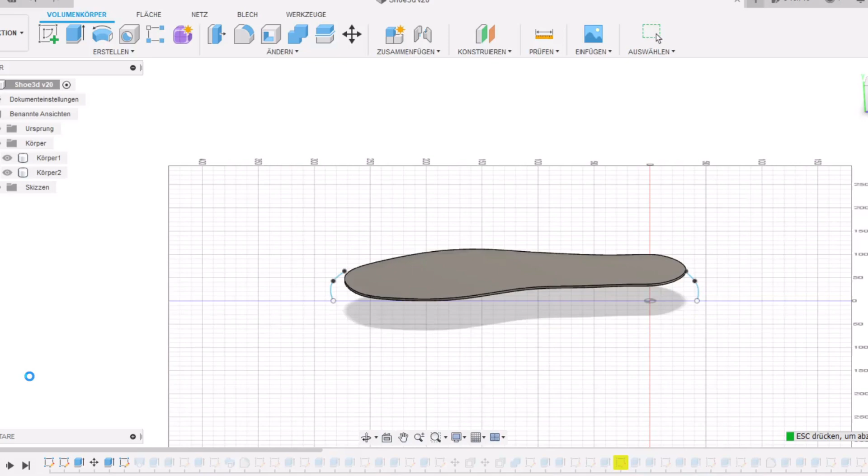As every time, I started with drawing the outline of my foot. When you do that, it's very important to angle your foot because otherwise the shoe will be too short when you actually walk with it. But you can also take the sole of a shoe that fits you well. Copy it to Fusion 360 and then extrude it down, how high you want the sole to be in the back. I recommend taking 3 centimeters. Then you draw another sketch to cut it so that the sole is about 1.5 centimeters in the front.

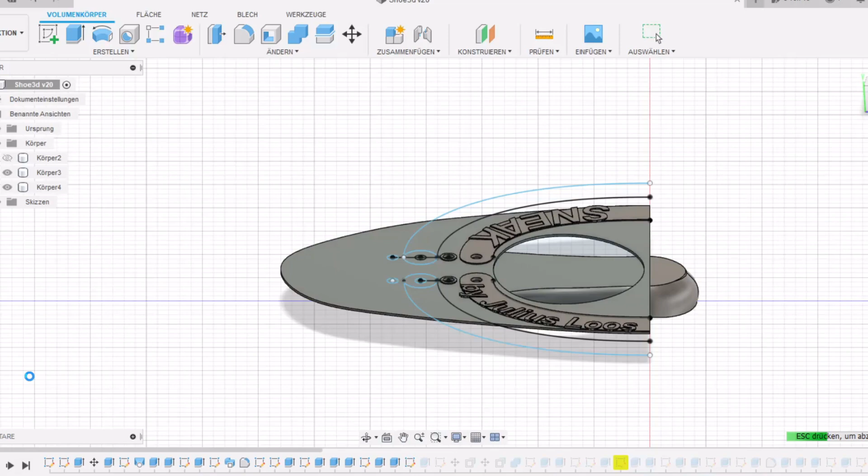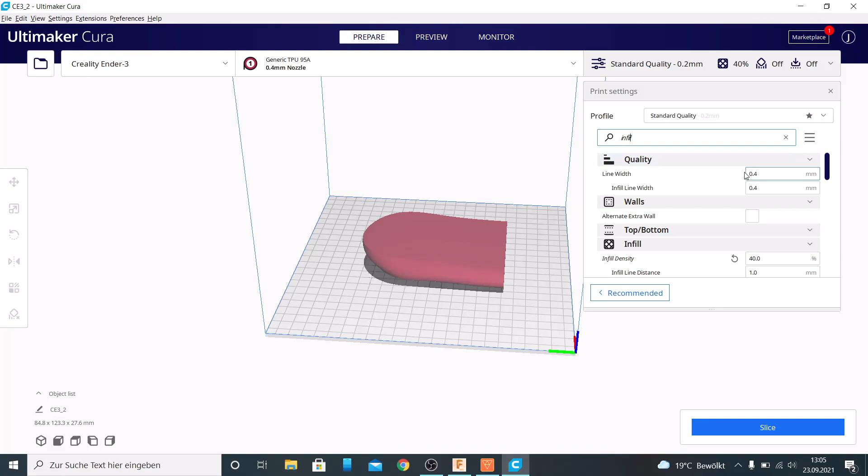Then you need to take a bigger paper and wrap it around your foot. Then you draw where it touches the ground, and also other important things like the cutout for the leg or for the laces. Copy it to Fusion 360 and add an adhesive surface. Cut it down so it fits in Cura, and then you can change things there, like changing to 0 wall, top and bottom layers, and the infill to 10% cubic infill and infill multiplier 3.

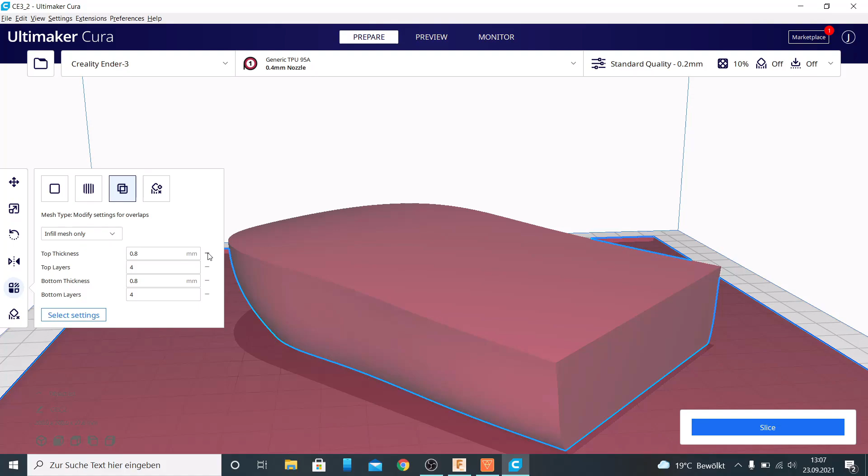That's what I chose, and I weigh 65 kilograms and have foot size 46, or 12 in US and 11.5 in UK. Spoiler, the suspension is good with TPU 95A. Then you can use support blocks to modify overlaps. Add bottom layers and take something like 4. And then you need to print, and it doesn't take long. Just about 32 hours, at least for me. And in the end, it weighs about 220 grams.

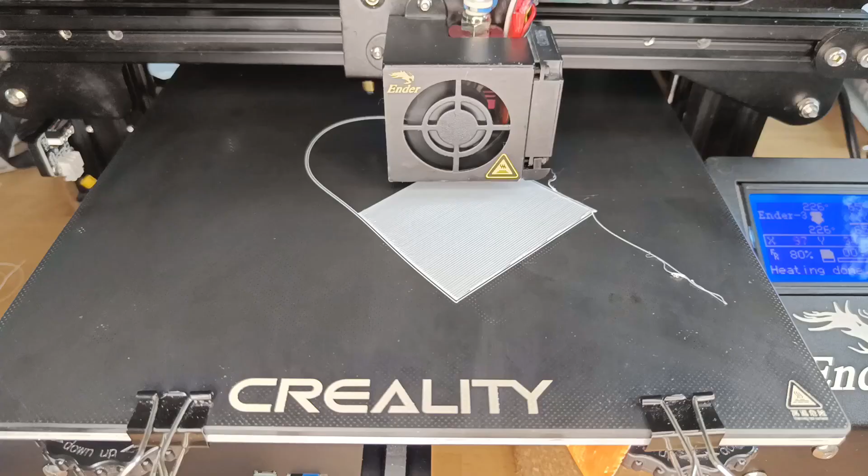Good morning, life. Good morning, sun. How are you? Skies above.

And after you survived all this printing, the trickiest part is yet to come. The gluing or melting together of the parts. And yeah, it takes a long time for me. In general, something like half an hour, and it was very hard. As you can see in the coming video, I just melted away some areas of the adhesive surface, and that wasn't perfect. And then I ran out of super glue, so I had to continue melting them together.

But yeah, I think maybe super glue is the better option, but it feels like melting holds up better, but maybe that isn't true. What I would do in the future is melt the parts together, like the upper part and the sole, and then glue these two parts with the adhesive surface together with the super glue.

Good morning, life. Good morning, sun. How are you? Skies above. Gee, it's great to be alive and in love. Good.

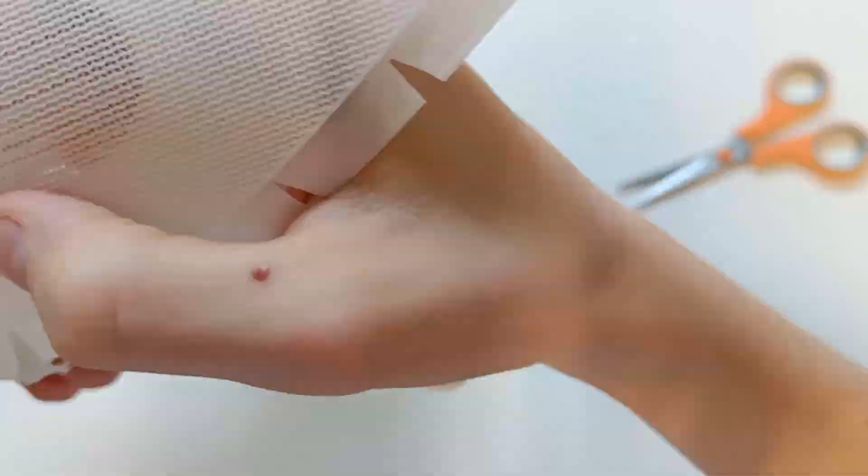Now it's time to test the shoe. And for that, I'm gonna run and walk 100 kilometers.

Let's go. Good morning, life. Good morning, sun. How are you? Skies above. Gee, it's great to be alive and in love. Good morning, sun. How are you? Skies above. Gee, it's great to be alive in love.

And that's it. Exactly 120 hours later, I'm exactly where I started. Just with 100 kilometers more on the clock. Let's see how the shoe looks. It's still pretty good, just here in the front. I didn't glue that down perfectly, so that didn't hold up from the beginning, because as you can see here, I completely melted it away.

But the other parts are very good. Just those parts didn't become cleaner. That was because of the lighter. It turned black, and I couldn't get it off. But despite that, it's pretty good. The sole also looks pretty good. We don't have any damage here, but the sole is making some noises, which I can show you.